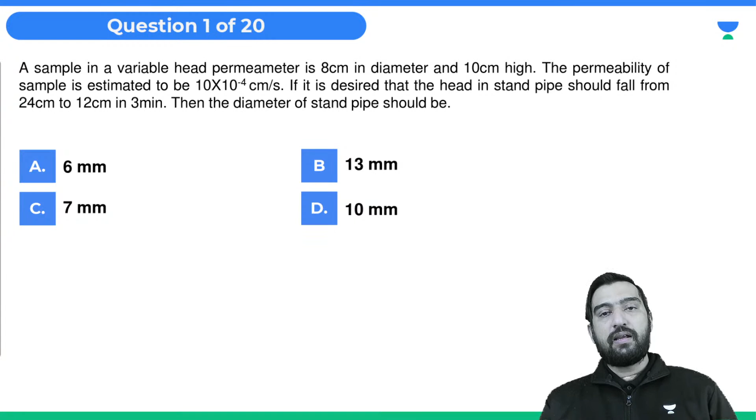Okay, so here is question number 1 on your screen. A sample in a variable head permeameter is 8 centimeter in diameter and 10 centimeter high. The permeability of sample is estimated to be 10 into 10 to the power minus 4. If it is desired that the head in the standpipe should fall from 24 centimeter to 12 centimeter in just 3 minutes, then what is the diameter of standpipe?

Okay, so what will be the diameter of the standpipe? This is the question. So question number 1. So your time starts now.

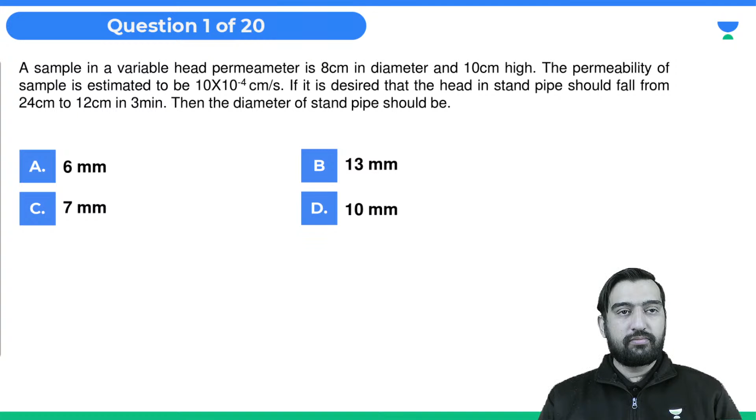So the solution is permeability. It is a falling head test: k = 2.303 aL over AT into log H1 over H2. So, looked at one way, you just have to find the area, because they are asking the diameter, the standpipe diameter, so the rest of the things are known to you here.

So it is given to us that 10 raised to the power minus 3 centimeter per second is the permeability. It is 2.303 a, which we have to calculate. L is how much? It's 10 centimeter high, divided by A. What about capital A? It is pi into 16, and into what is the time? 3 minutes means 180 seconds. Okay.

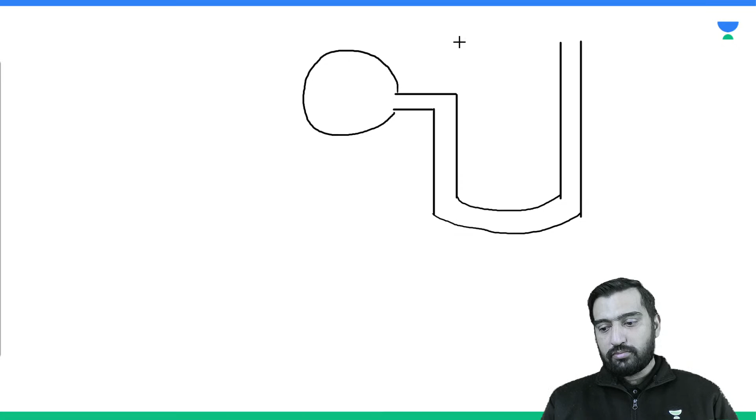So let me draw the diagram first. And this difference is how much? From here to here it is 100 mm, 0.1 meter. Sorry, from here to here, 160 mm is overall. This is 160 mm. So let's suppose this is H. This is the cross section which is given to you.

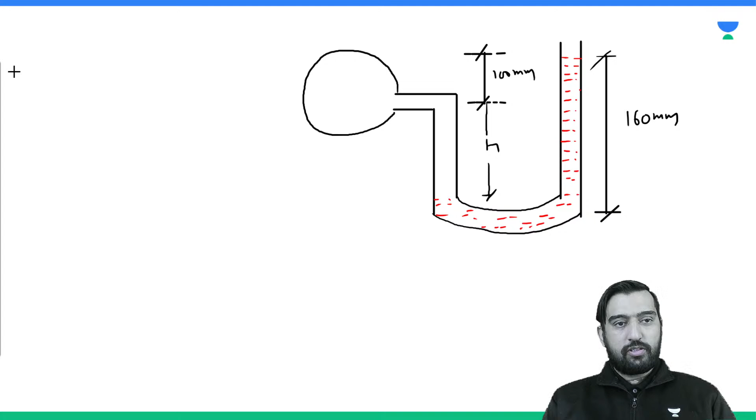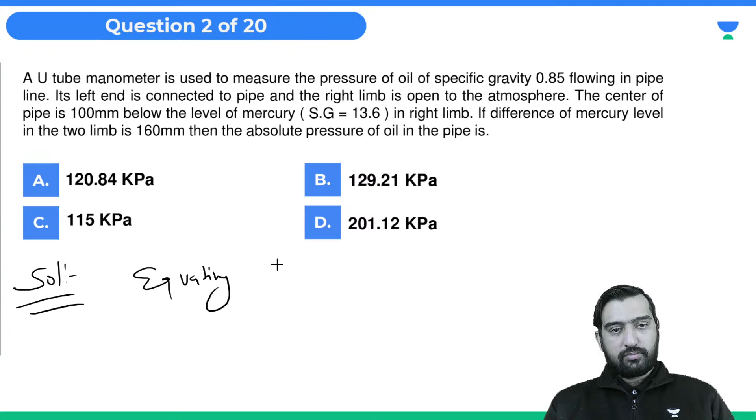Now you can equate the pressure at section XX. On equating pressure at XX, this 100 plus this one is equal to this entire thing. You can write it like this. So simply we can write H plus h1 into S1, g will cancel everywhere, is equal to h2 into S2. So H you need to obtain: H plus 0.06 into 0.85 is equal to 0.16 into 13.6, and this is equal to 2.125 meter.

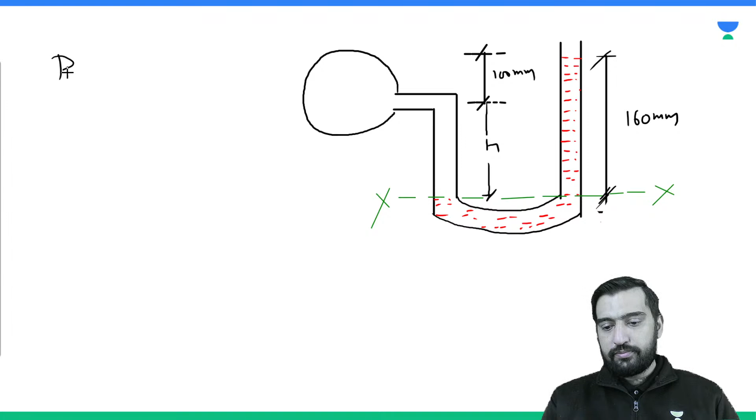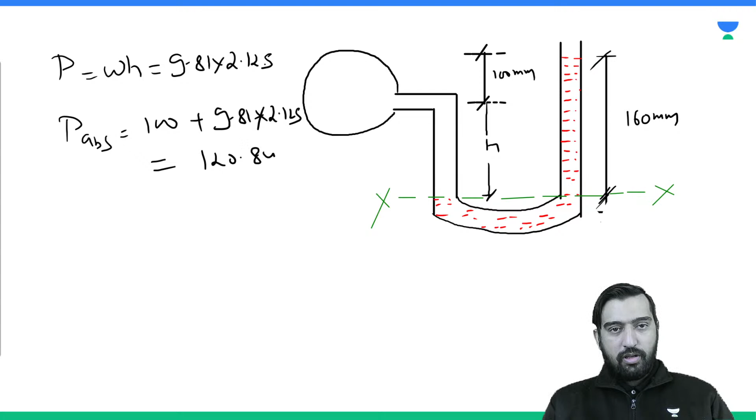So pressure is w into H, 9.81 into 2.125. So this is 100 plus that, on absolute scale. So this is coming out to be option A. So question number 2 of 20, option A.

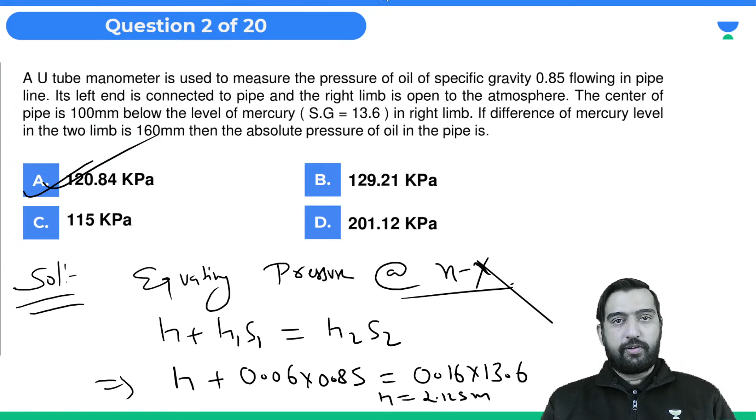Next is question number 3. An isolated 3-hour storm occurs over a basin. Percentage of catchment area and phi indexes are given to you, and the rainfall for the first, second and third hour are also given. Now you have to find the runoff from the catchment due to the storm. So this is again not a big deal here. So runoff volume

2.3 minus 1, 1.5 minus 1 into 20%, then 2.1 minus 0.75, and 1 minus 0.75 into 30%, then 2.5 minus 0.5, 1 minus 0.5 into 50%, and last 0.8 minus 0.5 into 1. This will be completely 1. So by this you can calculate the volume of the runoff.

So now 2.3 minus 1, 1.5 minus 1, this is 0.2 of the area, plus 2.1 minus 0.75 plus 1 minus 0.75 into 30% of the area. After that 1 minus 0.5, what was the phi index for this, 0.5, plus 2.5 minus 0.5, and the last one. Okay, so total it is coming out to be 2.24A, where A is the catchment area.

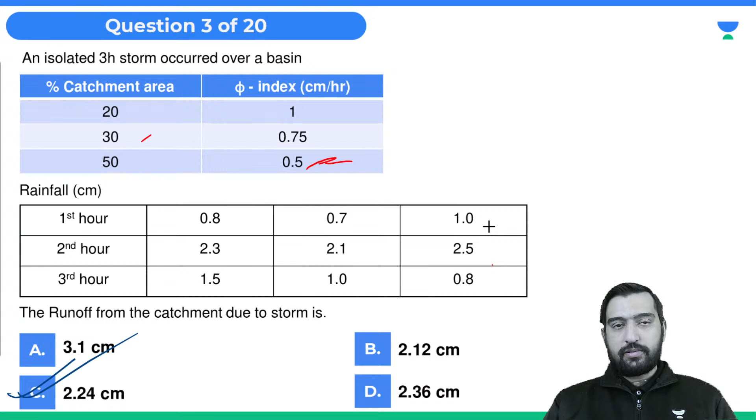Next one is from engineering mechanics. One inclined wedge is there, A of 1 kilonewton, a weightless rigid bar, and this is B, 3 kilonewton. So what horizontal force is required here so that A is just about to slide in the upward direction? So tell me.

So just draw the free body diagram here. If I am going to draw the free body diagram of this inclined wedge, then it can be written that it is like this. So this is the T. Okay, and this angle is how much? 30 degree. So this is 1 kilonewton acting in the downward direction.

So I can write that T is equal to WA, which is 1 kilonewton, into sine alpha plus phi over cos theta minus phi. So alpha is 45, phi is friction angle, 15, and theta minus phi is 15 minus 30. So this T is coming out to be 1 kilonewton.

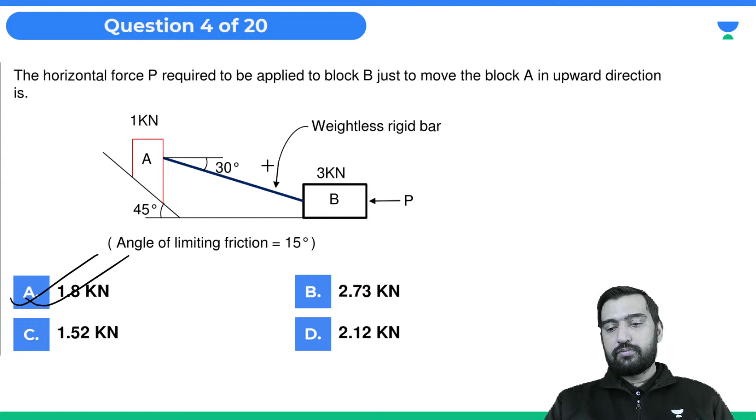चलिए next. Next is the ratio of weight of equal length of a solid and a hollow shaft to transmit a given torque for same maximum stress if inside diameter of the shaft is 3/4 of the outside. So now my dear friend, how to proceed? So for solid to hollow.

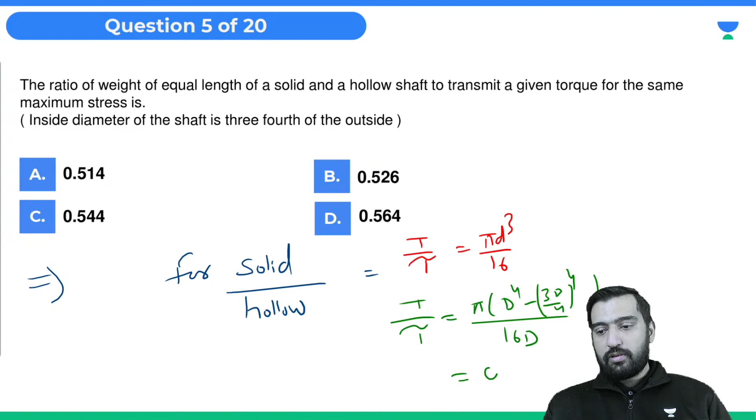Okay, so here you can see that this is T by tau is equal to pi d cube by 16, and this is T by tau, it is pi बड़ा वाला minus inner, 3/4 दे रखा है क्वेश्चन में, upon 16 D. So this is 0.6836 pi D cube by 16. So this is given to you.

ठीक है. So we are equating the two, because it is the same. So when we are equating these two, we can write that pi d cube by 16 is equal to 0.6836 by 16 into pi D cube. Okay, so this and this will get cancelled. So this d by D is coming out to be 1.135.

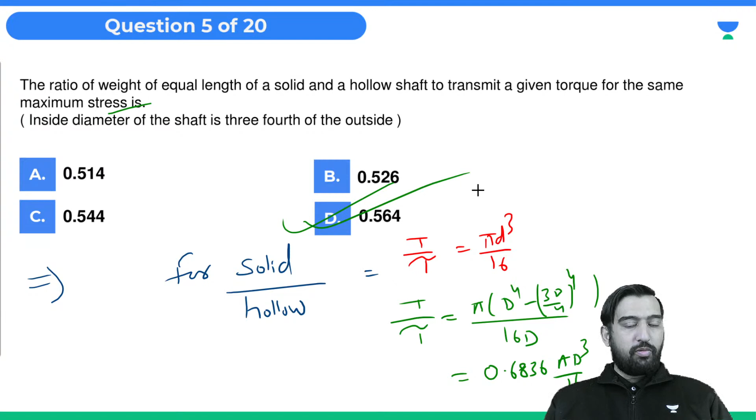After that, if we are going to calculate the ratio of weight of equal length, so it is area of hollow upon area of solid. So this is D square minus (3D by 4) square, this one. So d by D is known to you, so it is 0.564. Option D, it's coming out to be. Okay. Sixth question.

The distance of 2000 meter was measured by a 30 meter chain. Later on, it was detected that the chain was 0.1 meter too long. Another 500 meter was measured, and it was again detected that the chain was 0.15 meter too long. If the length of the chain in initial stage was correct, then exact length measured was? Aptitude question है dear. ठीक है.

So mean length of the chain for first 2000 meter is L dash, 30 plus 30.1 by 2. So it is 30.05. Okay. And again, mean length for last 500 मीटर.

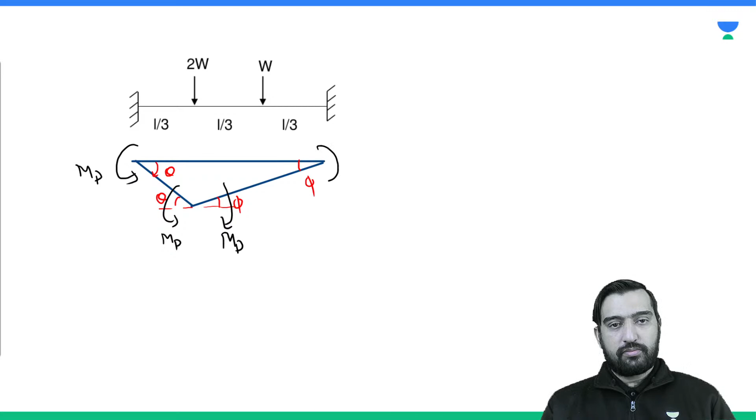So as per mechanism one, let me assume that this mechanism is happening here. So collapse would be happening like this. Theta, theta, phi, phi. Okay. So this is MP. This is also MP. This is also MP. This is also MP. एक्सटर्नल लोड की बात की जाए तो this is 2W into 2L/3 phi. This is W into L/3 phi.

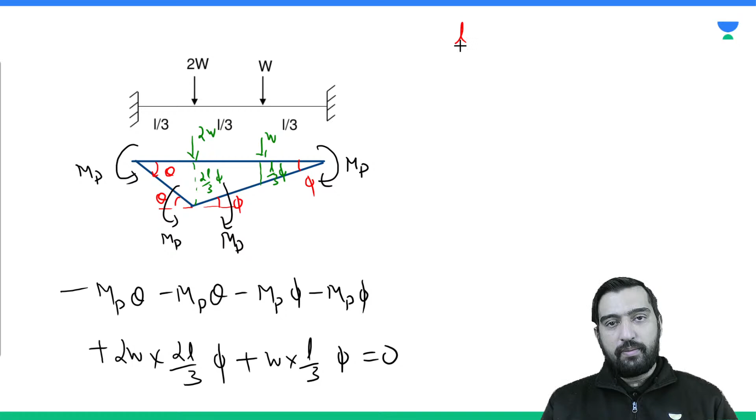So work done compare करोगे तो minus MP theta minus MP theta minus MP phi minus MP phi plus 2W into 2L/3 phi plus W into L/3 phi is equal to 0. So also we can write here L/3 theta is equal to 2L/3 phi. So theta is equal to 2 phi. So from there we can say 2, 4, 5, 6. So 6 phi.

On substituting this value I can write minus 6 MP phi is equal to minus 4/3, 1/3, 5 W L 5/3. So W is 18 MP by 5. So this is the value of W here. If this is the value of W, then we can say it is 1/5,

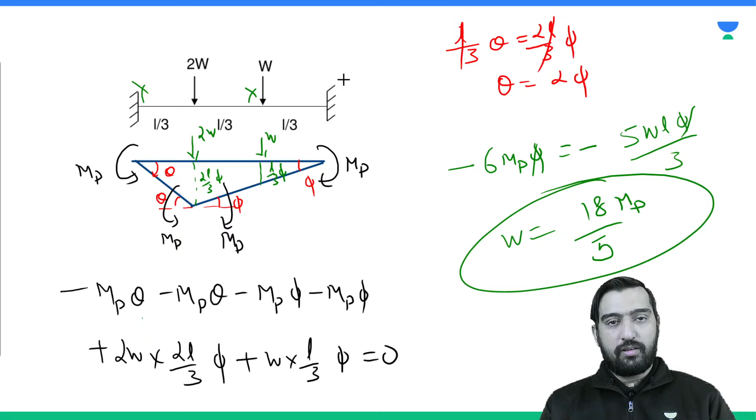1/7 and all. So also you can check it for other mechanism, let's say for this and this. So here the value will not be that much. So this is going to be the most critical one. I have checked the cases. So the critical mechanism is this one, and for this answer is 18/5. For mechanism 2, the answer is coming out to be 18/4. Please note it down. Please do it yourself and check. Chalo.

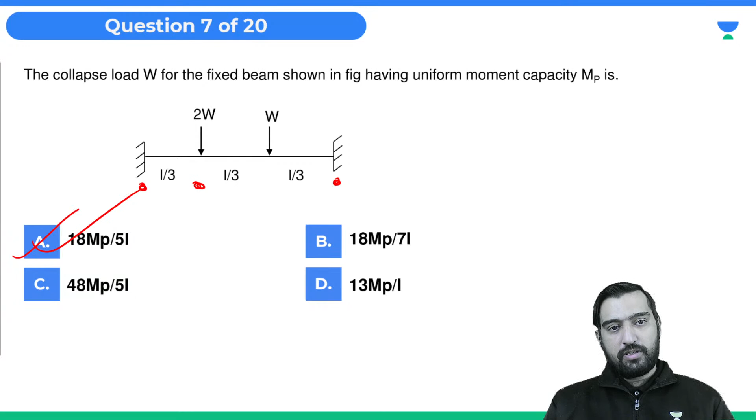Next, a pre-tensioned concrete beam is 100 mm wide and 300 mm deep, is pre-stressed by a straight wire carrying an initial force of 150 kilonewton at an eccentricity of 50 mm. The modulus of elasticity of steel and concrete are 210 and 35 kilonewton per mm square respectively. If the area of steel wire is 188 mm square, then what is the percentage loss of stress in steel due to the elastic deformation of concrete? चलिए ये वाला बताइए. Okay, so it's basically from the losses.

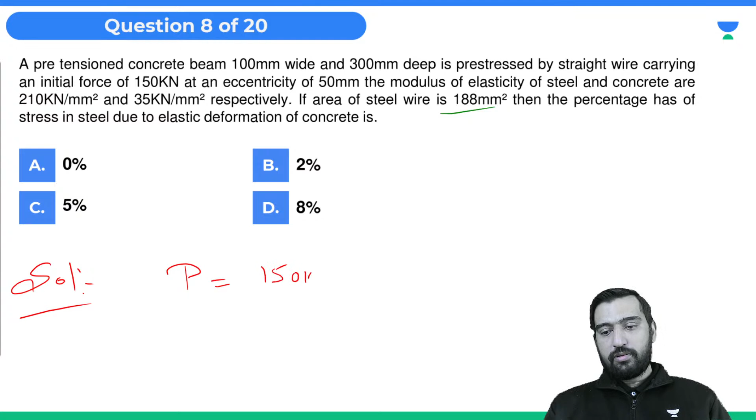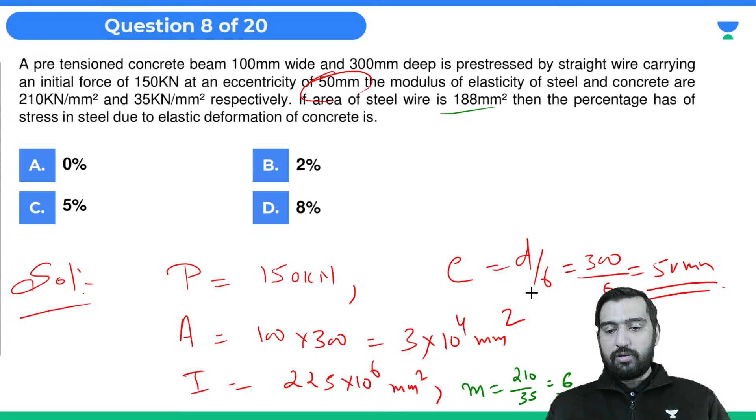P is 150 kilonewton. E, check it, D by 6, 50 mm only. And I is coming out to BD cube by 12. And modular ratio is how much? 210/35, तो modular ratio 6. Okay, now what is the initial stress in steel that you can calculate? It's 800 Newton.

Now stress in concrete, FC, so 150 load upon area plus stress developed due to the eccentricity of steel at the level of fiber. So loss of stress due to elastic deformation of concrete is m times of FC, so it is 6 times of 6.66. अब percentage निकाल दो finally. So percentage of loss of stress in steel. ठीक है, ये चल रहा है.

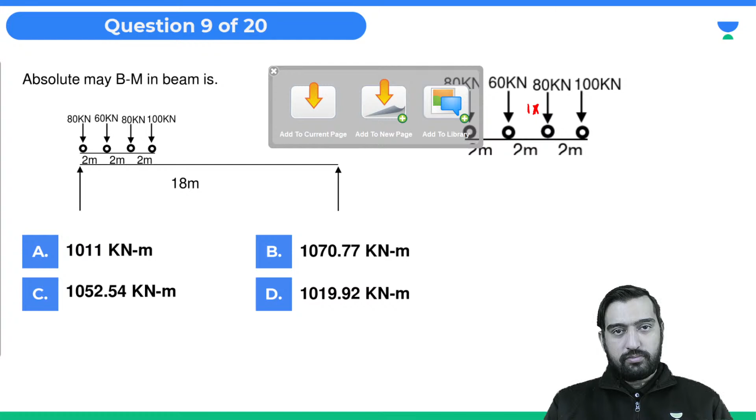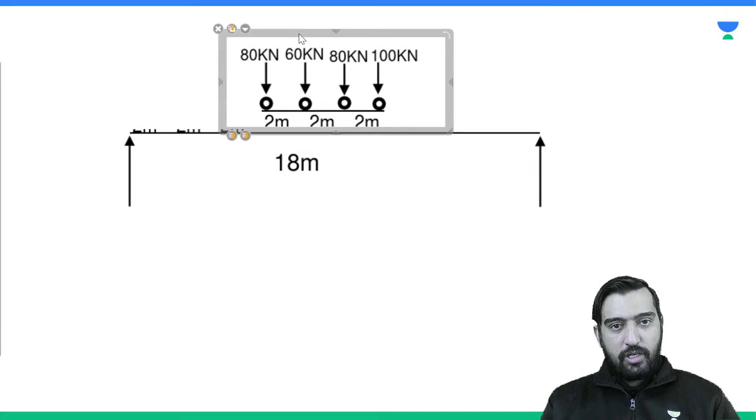And what is the scenario? When center is going to lie midway between this CG as well as this 80, and it will happen under 80 kilonewton of load. So position can be easily determined. So suppose this is a beam, okay, and when it will happen, it will happen under 80. So first of all, the center of this span is 9.

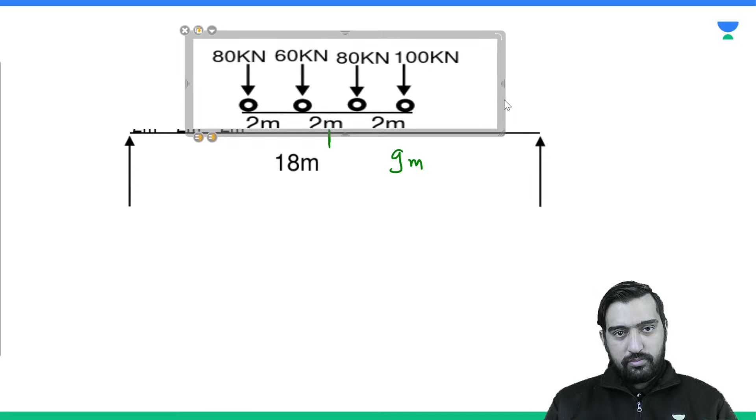So this is the CG. Sorry, this is when center of this span is midway of CG of the load system and load under consideration. So what about this distance? This distance is how much? So it's 0.375 from here. So it's going to be how much?

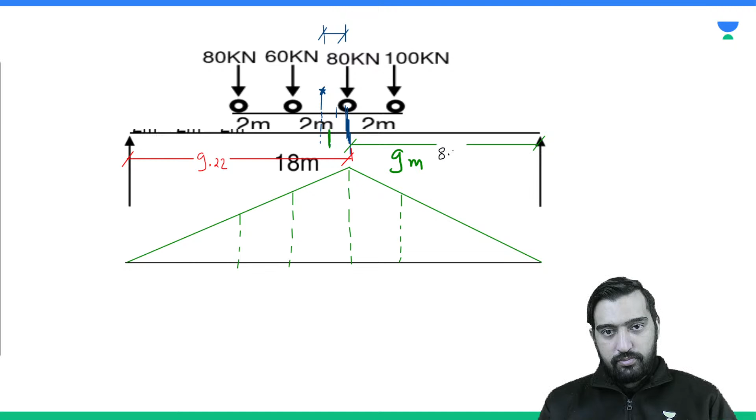So this is 9.22, and this is the remaining one, and it is going to be 18 minus 9.22, means 8.78. Okay, so this is 9.22 into 8.78 divided by L. So this you can calculate. So it is 4.497. So with the help of this you can calculate others as well.

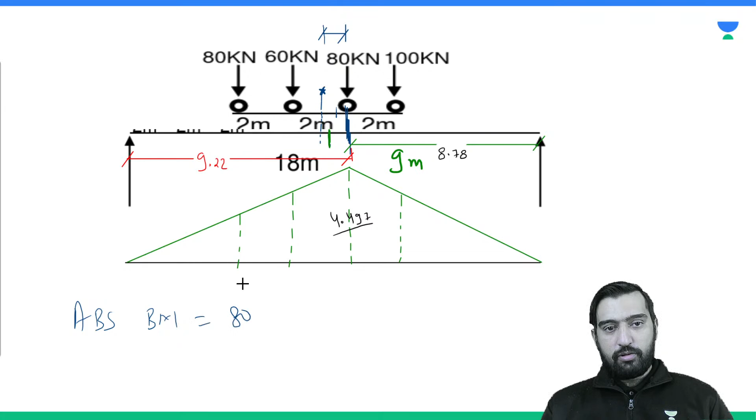So now the absolute maximum bending moment is 80 into y1, plus 60 into y2, plus 80 into y3, plus 100 into y4. So y1, y2, y3, y4 can be computed from similar triangles. So after computing the values of y1, y2, y3, the absolute bending moment is coming out to be

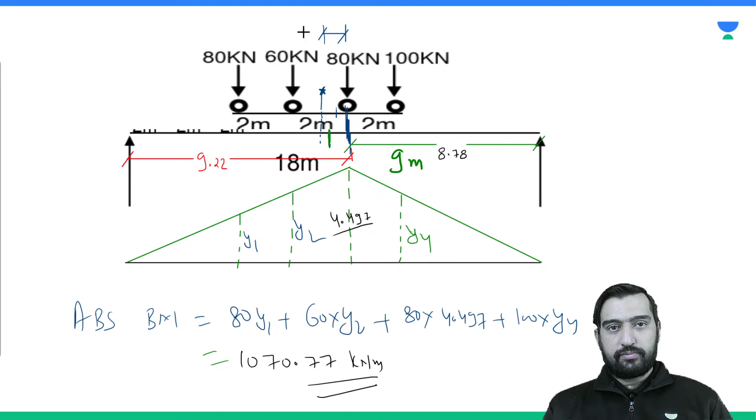1070.77 kilonewton meter, and it will happen under this 80 kilonewton load. Okay, are you getting this point or not? So this is the case. So 1070.77. So option B is correct.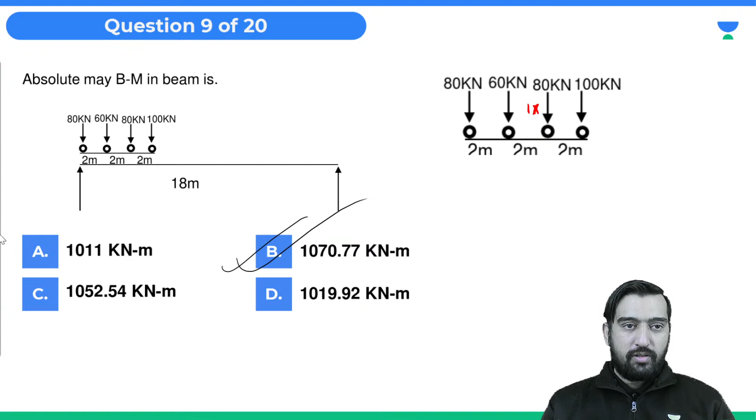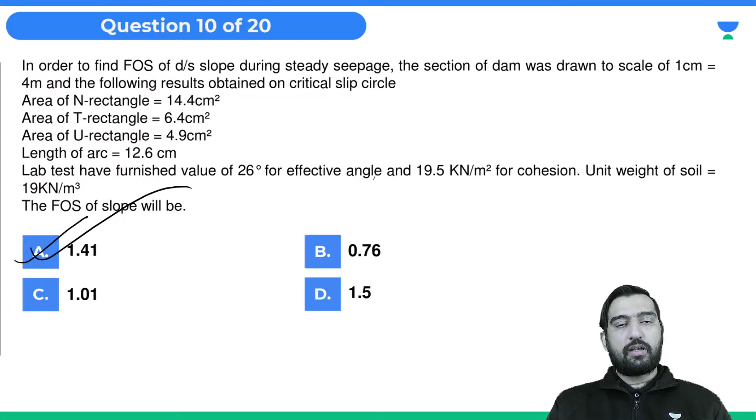So like this we have completed our 2 marks technical portion. Now we have to start our non-tech 2 marks portion. This is from question number 11 to question number 15.

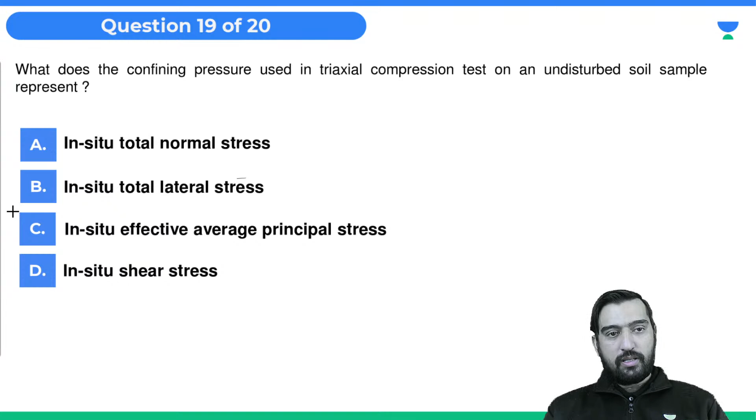Next, what does the confining pressure used in a triaxial compression test on an undisturbed soil sample represent? It represents the in situ total lateral stress. Now the last, the ideal condition of energy dissipation in the design of a spillway is when the tail water rating curve coincides with the jump rating curve at all discharges. This is the ideal condition for energy dissipation.

So I hope guys again you liked these 20 questions.